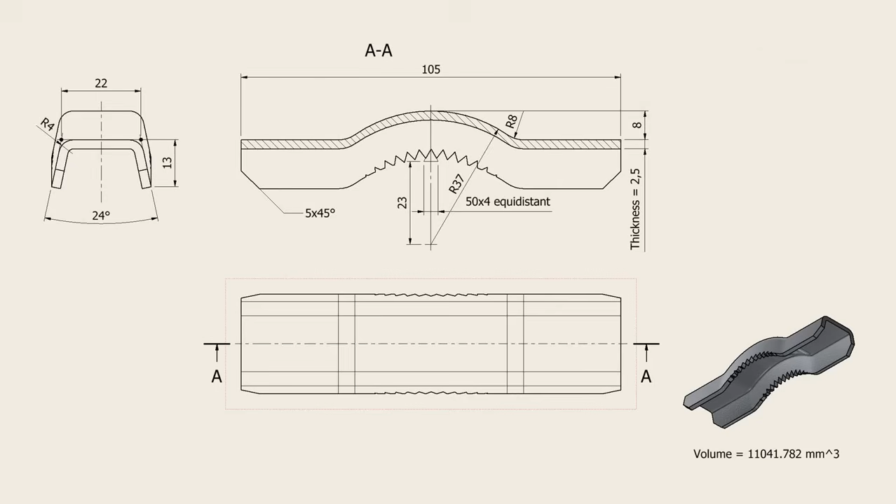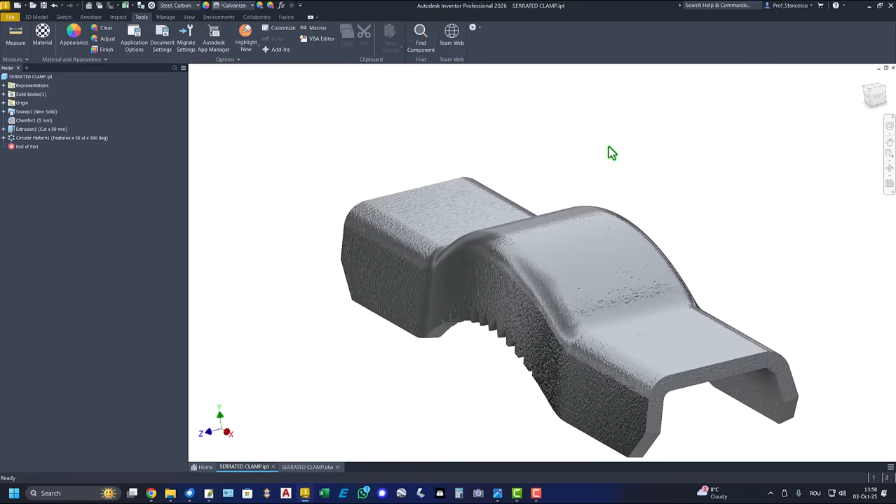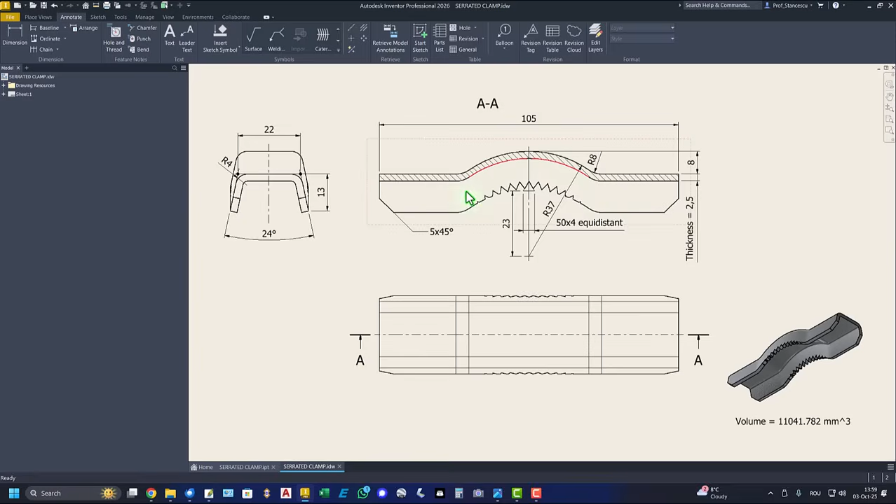Today we model this part with the name serrated clamp. This is the drawing. We start by creating this contour, then this other contour with the thickness of 2.5, and this will be a closed contour, a sequence of lines and arcs, and we'll use the tool sweep to obtain that object. Let's do this.

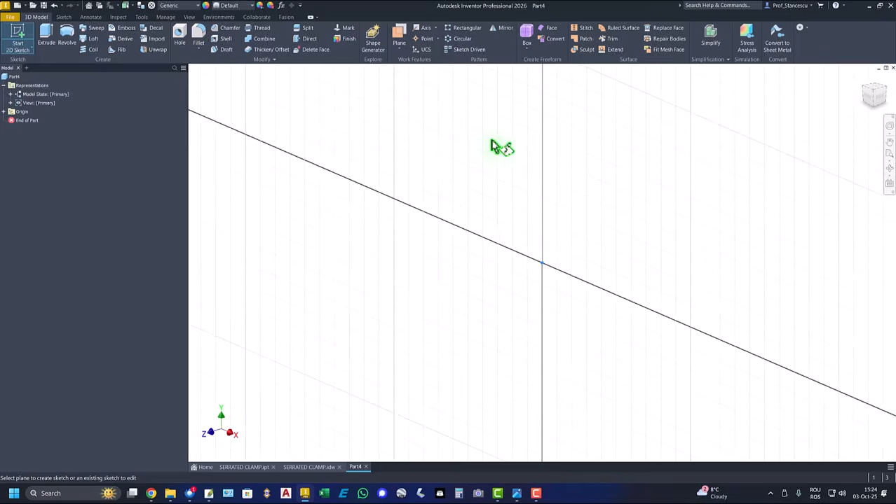New, standard millimeters IPT, new sketch, XY plane, and we draw some entities here. A line. Keep pressed the left button of the mouse, go here, keep pressed the left button and go to the right, almost symmetrical, but keep your eyes on that fine horizontal. Now you don't see, now you see it, yes?

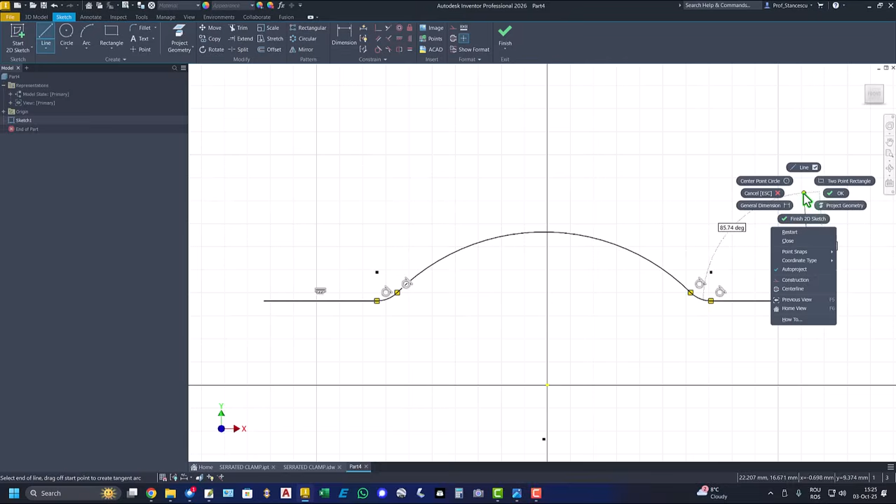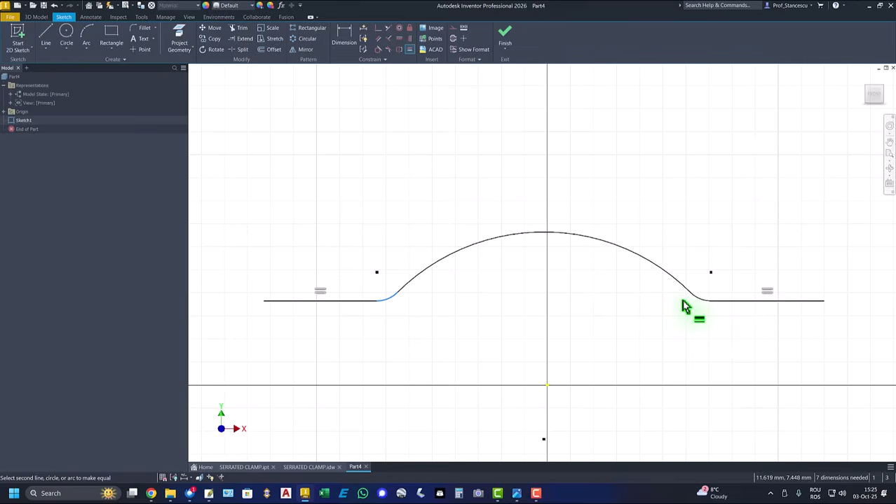Then keep pressed the left button and go to the right by finding this horizontal again. You also see a fine vertical. I finish this and I draw another horizontal. Okay, now we have a tangent here, here, and also here. Very important, very interesting. Then we apply equal to these two lines, equal to these two arcs. We place this point coincident with this point, and now we have to place dimensions. All of these were constraints.

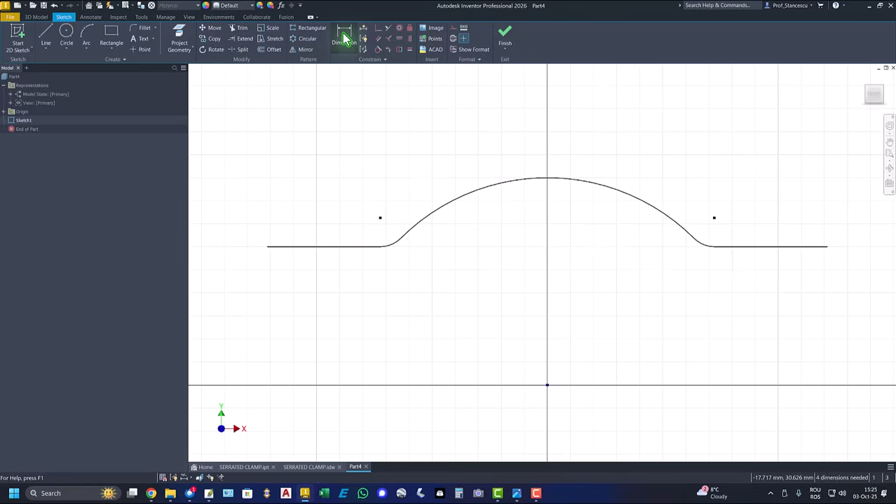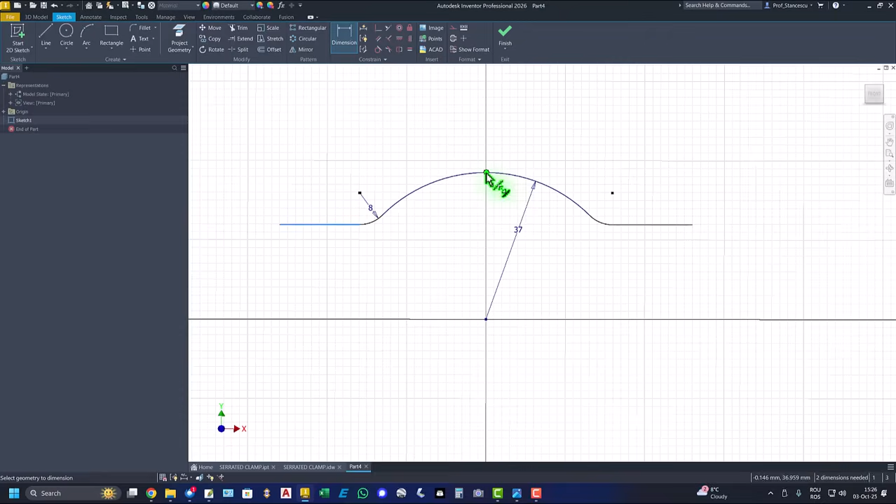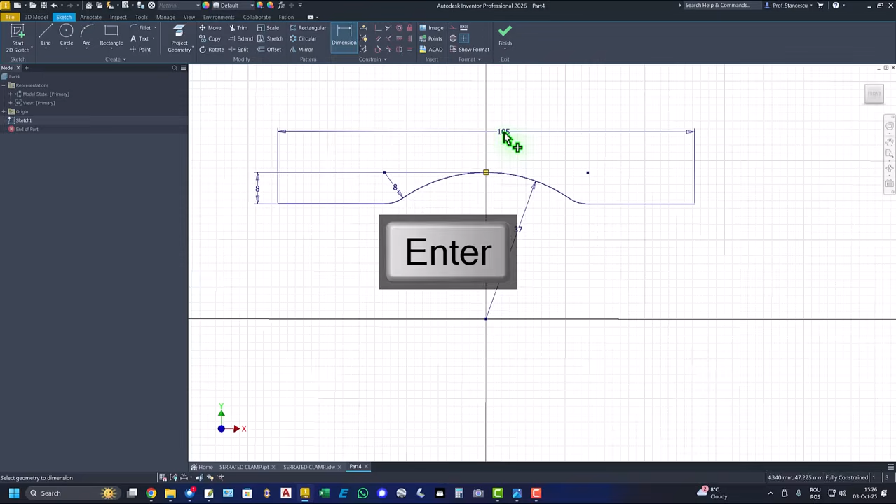Dimension radius 37, and everything will be scaled. You see, radius 8, then also 8 is this. Now we have only one dimension needed. It is the total length, 105. Now we have a fully constrained sketch, yes? Okay.

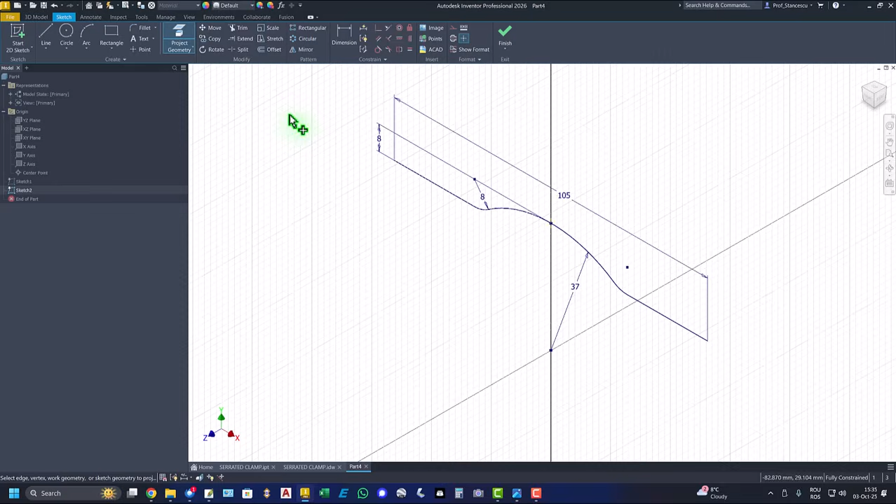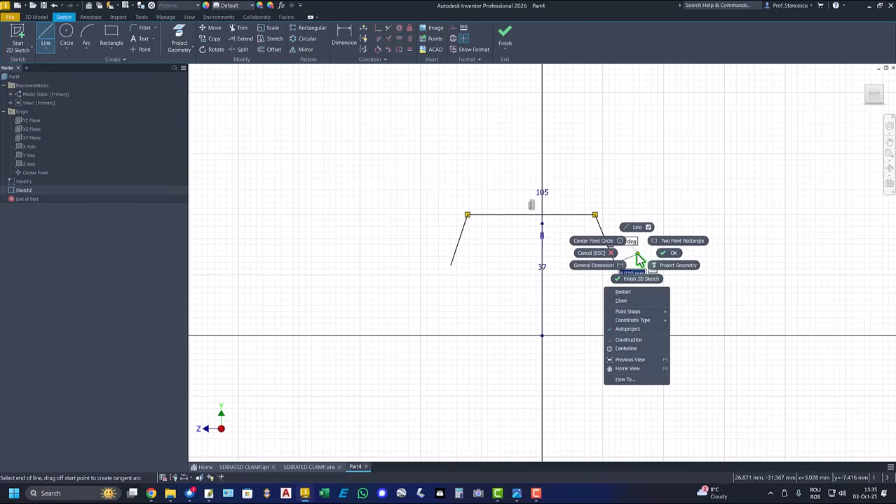A new sketch will be placed in this plane. F5 to have the same view. We project this point, and now we can come back to this view. We know that this is a point to be used. Then we draw some lines. 1, 2, 3. These two sides are equal. This midpoint is coincident with the projected point, and we place dimensions.

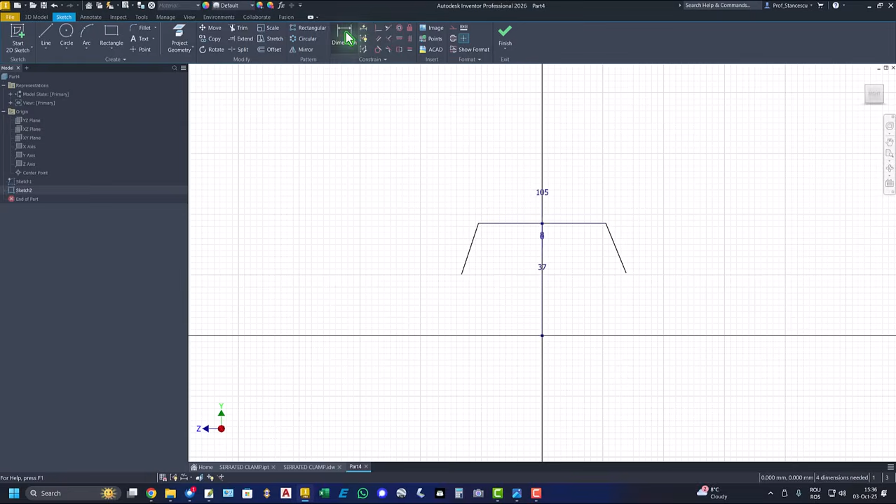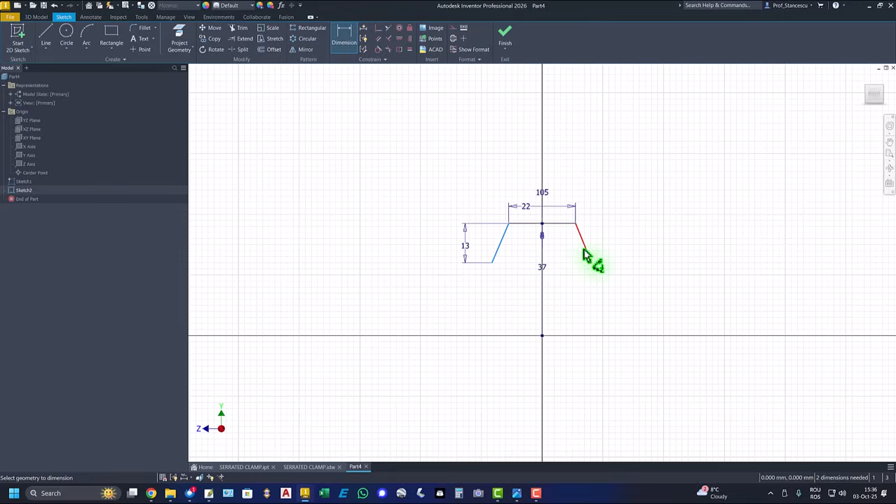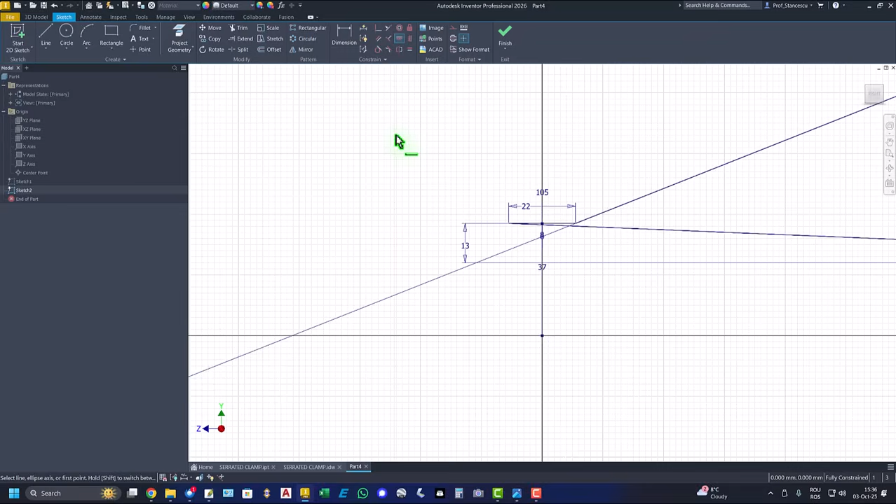This is 22. This is 13. We place an angle of 24. Then we place on the same horizontal these 2 points. 1, 2. Not horizontal because Z is vertical, and we have to apply Ctrl Z, and vertical, not horizontal. Practically, we have to use this orientation. You see, Y is horizontal, Z is vertical. We use vertical now between these 2 points. We have a fully constrained sketch.

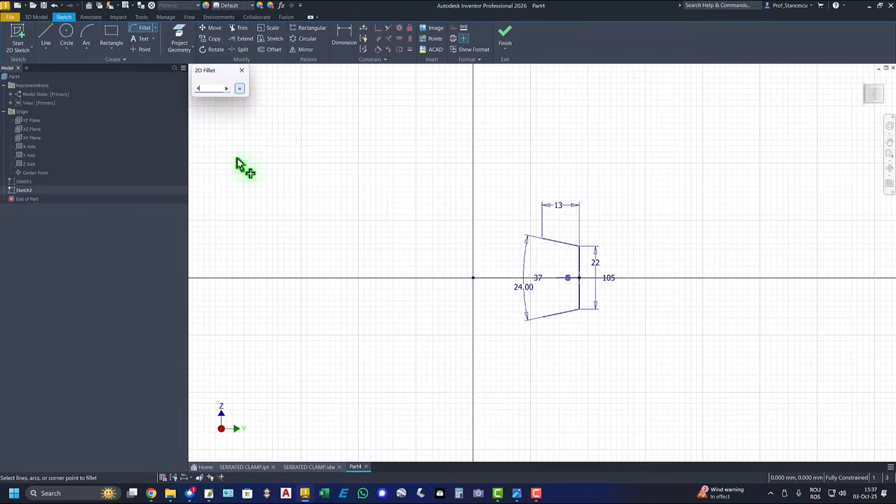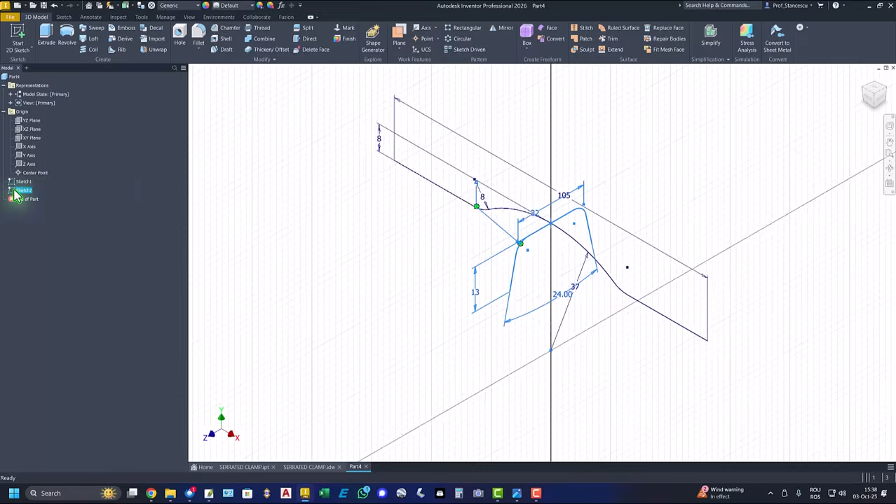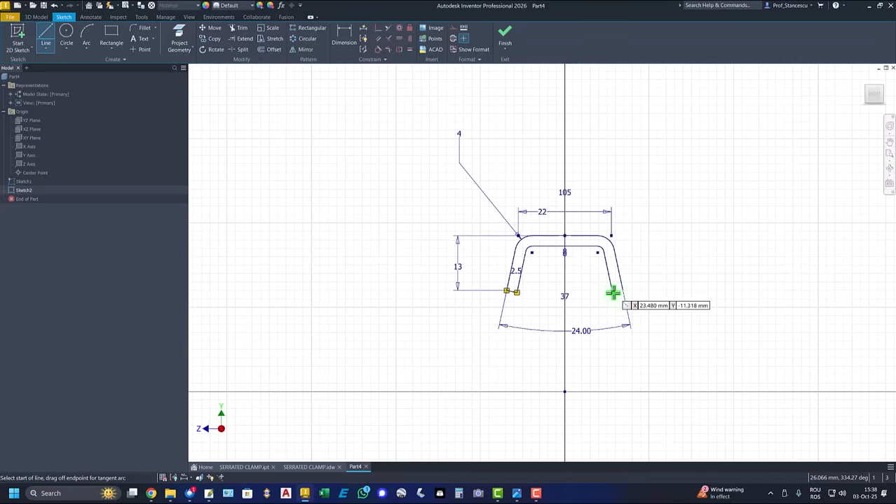Yes, but we have to apply this radius 4 at the corners. Fillet 4, this corner and this corner. Finish sketch, and you see all those entities. Yes, but we want to apply offset of 2.5, 2.5, and to connect these 2 ends and also these 2 ends. Now the second sketch is finished.

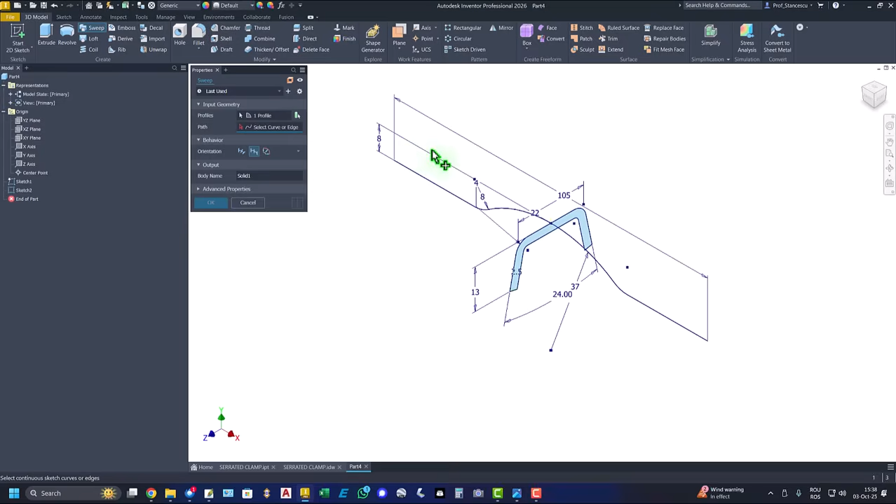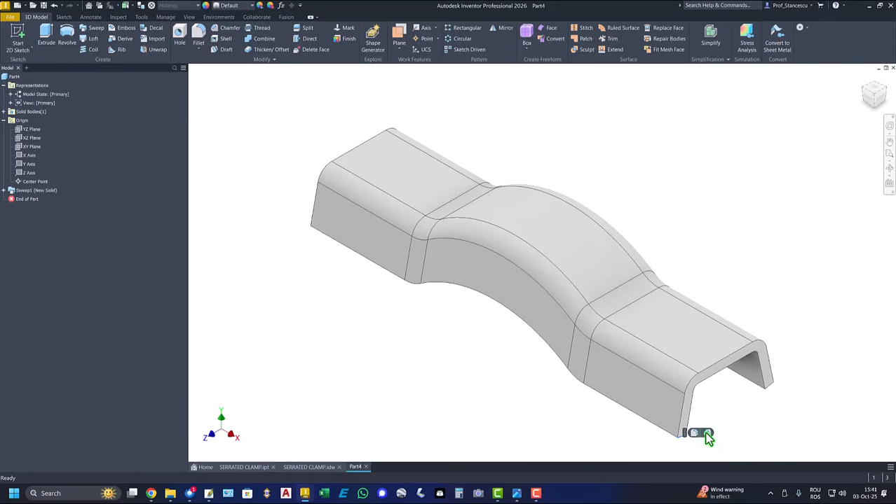Yes. Then we use the tool sweep, as I mentioned before. Inventor finds a closed contour and waits for us to select a curve or an existing edge on the part. We have here a curve. We select it. OK. Yes. Good. Now we have to apply these chamfers at each corner. We select this, chamfer 5. Then we select also the other 3. OK.

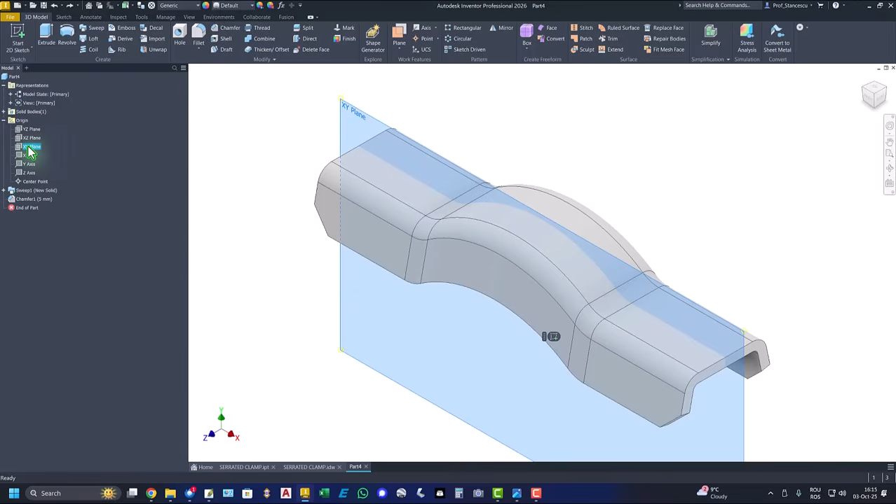Next is this cut. You see here a triangle which is an equilateral triangle. Its placement is 23 from the center point, and we'll apply 50 times this after we create the first cut. We use XY plane, F7, to create a polygon, a triangle, 3. We draw that triangle. We make this bottom line horizontal. It is 4 millimeters. Then we place it on the same vertical with the center point at a distance of 23.

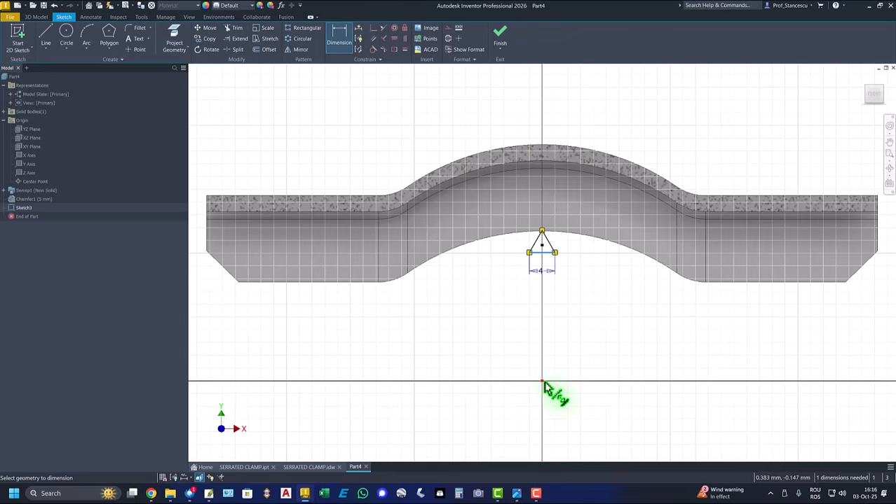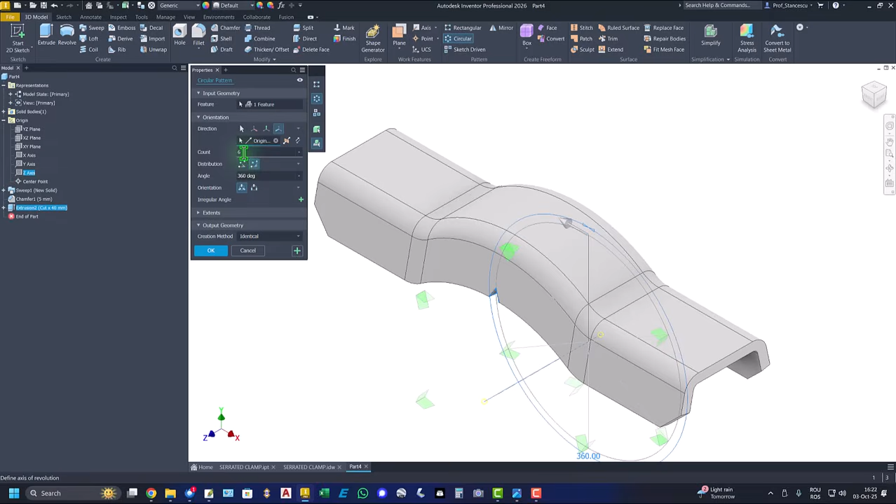Finish sketch, and we apply extrude of that triangle, symmetrical with cut, not all the way because it limits to here. We apply a larger value, for instance 40 millimeters, symmetrical. Okay, then we apply circular pattern of the last feature about Z axis with 50 occurrences. Okay, now you see the result. Very interesting. Let's see what is the volume.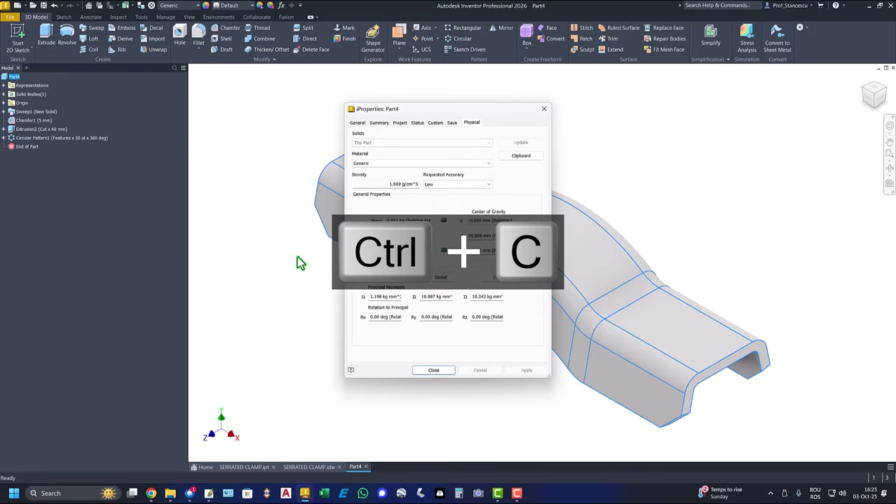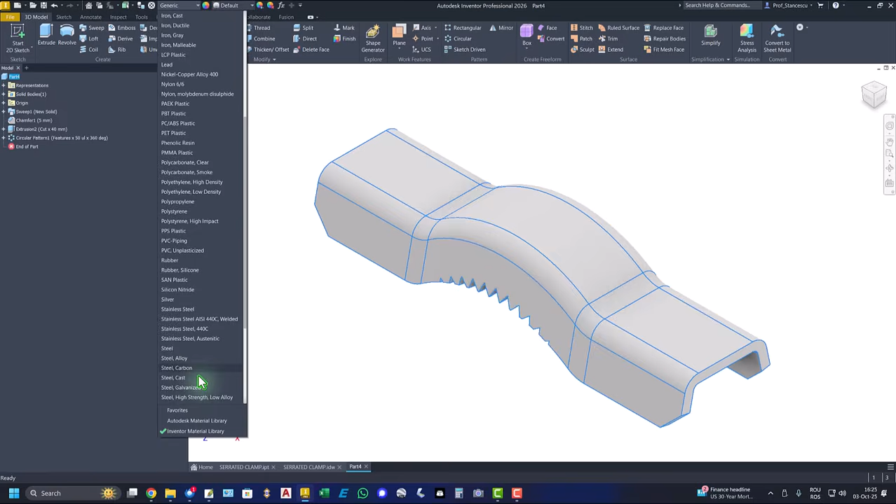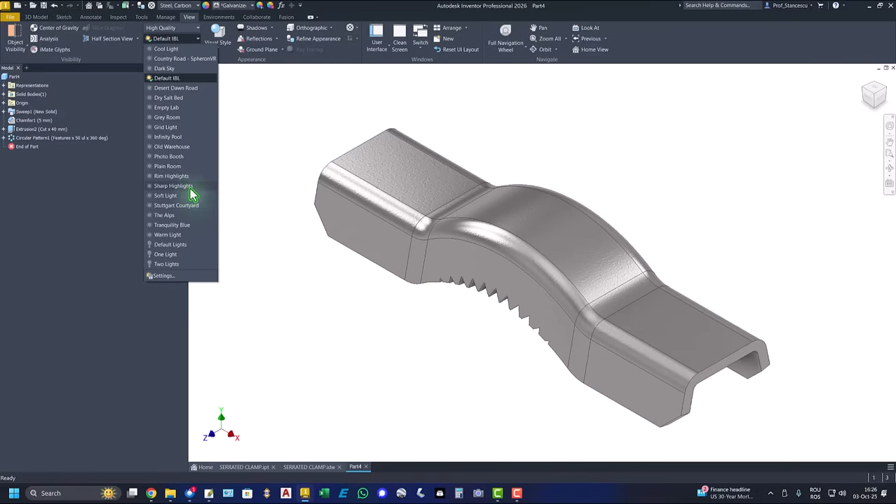iProperties, physical, update, copy, close, drawing, double click, and the new value is just the same. Cancel. We keep one of the two values. The material is still carbon. Then we apply an aspect of galvanized face. You see here that interesting texture. View, instead of default IBL, we use default lights. If you hide the edges, you have a nice part.